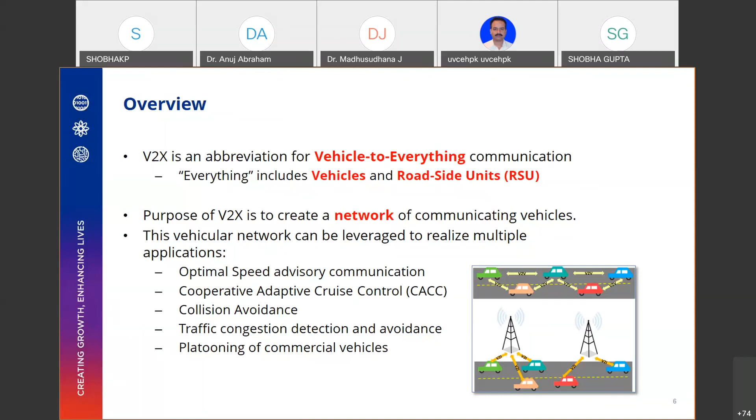So to develop all these use cases, we need a simulator to test the V2X protocols and applications. The first approach was to develop a simulator which integrates some software. Later we need to test the application on this and then in real-time deployments. So as I said, we have developed a V2X simulator, which is an integrated simulator platform.

The problem we were having is that some of the use cases like intersection collision avoidance and platooning we cannot directly test on roads, because there is a risk of collision, and we should avoid testing such applications in real life. And field trials are very often expensive. So we need to develop a V2X simulator so that we can test these sorts of applications in it. Then, a standalone system is not available.

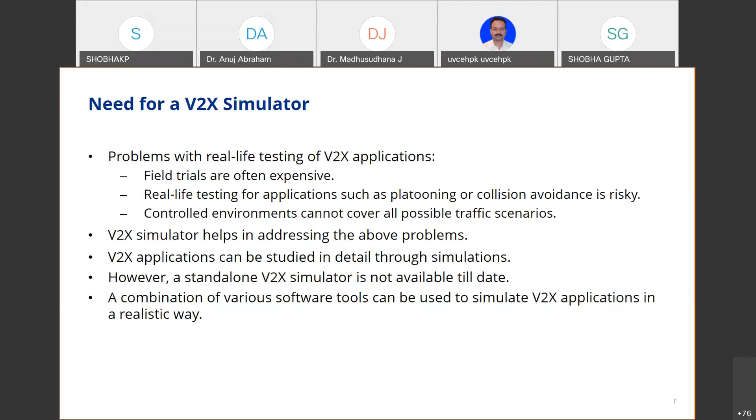In the research community, we can see several simulators have been proposed to study V2X applications. But since there is no standalone package to study V2X applications, we have come up with a standalone approach which integrates three main software tools, which I'll explain in the next slides. A combination of these software tools will allow us to simulate these V2X applications in a realistic way.

So for this V2X simulator requirements, what we want is three components. The first one is a mobility, the second one is a network, and the third one is the application. All the control algorithms will be dealt with on the application side. The network side is meant for the communication section. Mobility is meant for the movement of vehicles. Maybe it should be a traffic simulator software where we can see the vehicles moving based on some control application actions from the other software.

So another requirement is a robust and realistic simulator for information exchange. So we should choose the communication model libraries in a much more effective way so that simulation time synchronization is good and the capability of modeling multiple applications is possible.

And also these algorithms are going to be tested in 2025 in Singapore. Singapore is basically left-hand driving. All the other application simulators present are right-hand driving traffic. So we need to develop a simulator which supports Singapore traffic conditions. So that was another achievement we have come across from this particular development of the V2X simulator.

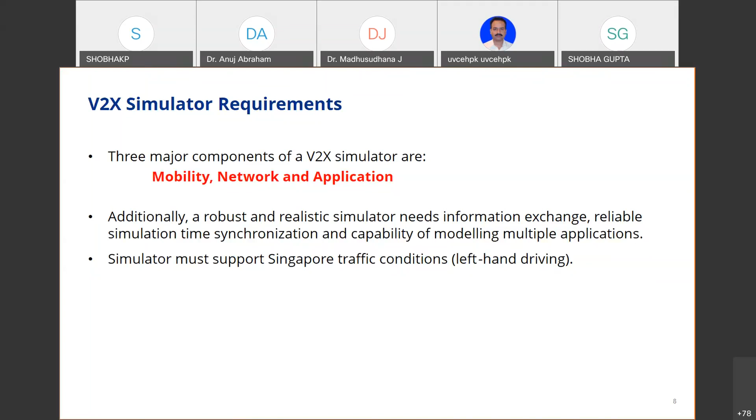So here we can see the basic integrated simulator design. As I said, the three components are already listed in the form of blocks: the mobility, the application, and the network. To demonstrate the vehicular communication as realistically as possible, we chose NS3, which is a network simulator, which contains some model libraries for simulating the WAVE architecture.

WAVE is going a bit into the communication side, but I'll come back to the control later on. WAVE stands for wireless access for vehicular environments. WAVE is actually a family of standards that allow secure V2X communication in a high-speed transport environment. So that is one of the advantages of using a WAVE architecture.

The platoon and the surrounding traffic are modeled in VISSIM. So here you can see the mobility component consists of VISSIM, which is a traffic simulator where we built our road network, the calibrated traffic models, the routing decisions, the routing models, the behavior model of the vehicles, the traffic signal phase timings, controller settings; everything will be done on the VISSIM side. VISSIM is basically a software meant for traffic simulations.

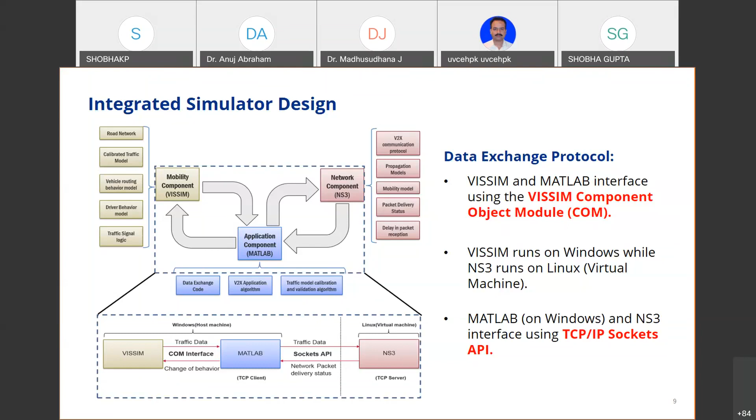So now coming to the simulation side of platooning. This platform is used for many use cases, like GLOSA. There is another one which is GLIDE, which is green link determining. In GLOSA, what we do is we have a fixed time signal cycle time for the traffic light, so the vehicle speed is given advisories.

Whereas in GLIDE, it's just the reverse, which means that there is no advisory given to the vehicles, but depending upon the density of the vehicles, some set of vehicles will be allowed to pass the intersection during a particular green phase. So the green timings will be either elongated or compressed so that you can use the intersection in a much better way. So that is another use case.

Bus bunching is another. Then platooning is another. Many use cases are there, but I'll be just focusing on the simulation of platoon for this presentation. What we have done here is we modeled a platoon, then we designed a controller for this, which is CACC control. We have used PID controllers, and we also tested with model predictive control to overcome some of the disadvantages in PID. We went with the MPC controller, and mainly we do speed tracking, maintaining some desired intervehicular distance, and packet delivery ratio will be analyzed.

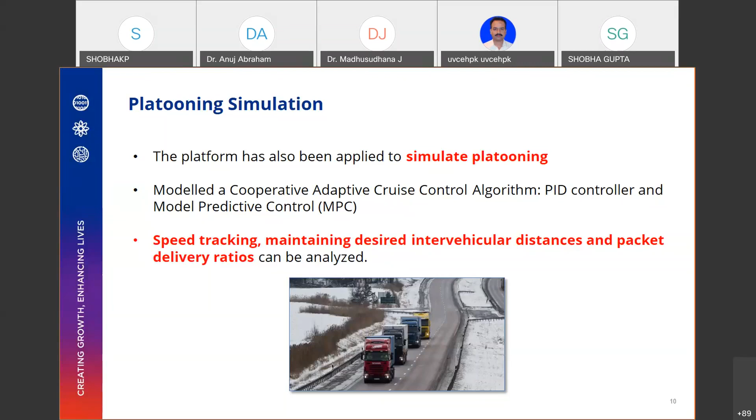Radar means radio detection and ranging. Similarly, LiDAR means light detection and ranging. LiDAR is also known as light radar in some papers. The main sensor used here is a radar. It is one of the crucial sensors you can see in ACC or CACC modes. It works on the principle of the Doppler effect. It is an object detection system that utilizes radio waves to determine the range and velocity of objects. It is primarily used to detect vehicles in front and rear.

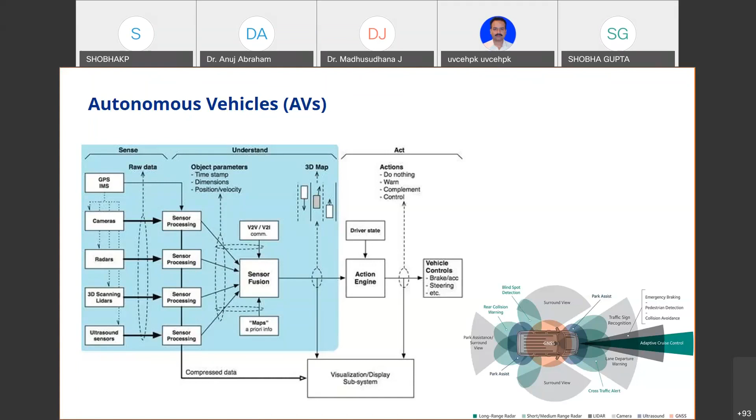Now in the next slide I'll explain what ACC is, and what the difference is between ACC and CACC. Before that, VISSIM uses a psychophysical car following model. What do you mean by the psychophysical car following model? It suggests that a driver's behavior would vary depending upon the traffic state, such as whether the driver is in free flow condition, approaching the vehicle in front, following the vehicle in front, or braking. These types of behaviors are observed with this car following model.

So in VISSIM, which is a traffic simulator, we use Wiedemann 99 and Wiedemann 74, which are car following model libraries available in VISSIM. The car following model is used to detect the driver behavior parameters, and the behavior of the platoon members was modified in VISSIM, and the acceleration and deceleration is calculated using the CACC algorithm.

So ACC is a system that automatically controls the gap between vehicles driving at high speed, by actuating the engine and braking controls, based on measurements of the distance to the preceding vehicles. Whereas cooperative adaptive cruise control is an enhancement of ACC that enables more accurate gap control and operation at smaller gaps by adding communication of vehicle status information from the preceding vehicles. So it is nothing but adding vehicle to vehicle communication to ACC. It turns into a CACC system. If you have vehicle to vehicle communication in a multiple way, then it forms a CACC algorithm.

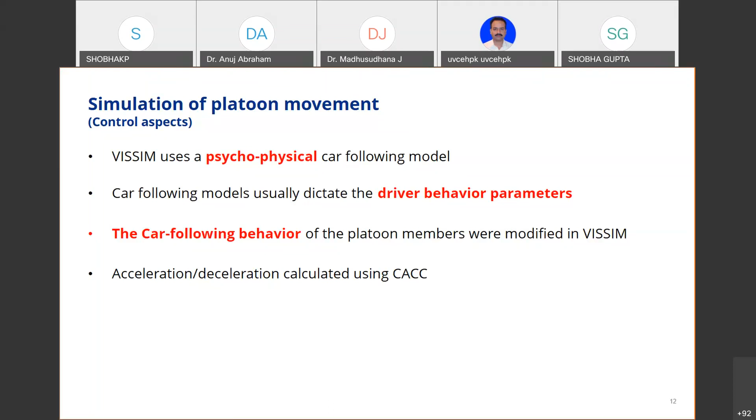In an ACC system, as I said, the controlled vehicle obtains the speed and position of the immediate neighboring vehicles to calculate its control inputs. For this, we use radar for communication between the platoon members. Due to some inherent time delays in radar communication, it is unreliable in some emergency conditions. So to overcome these shortcomings of the ACC strategy, we have proposed a cooperative adaptive cruise control, where we use wireless communication standards such as 5.9 gigahertz DSRC, which is dedicated short range communication, or 5G communication, which we use in mobile, to exchange data among the platoon vehicles.

So the use of wireless standards allows us for the sharing of a wider range of data, such as the GPS position, the IMU unit, then the control actions like throttle or braking. So the access to this more data helps in implementing some advanced control strategies. So that is one of the advantages.

So the use of these wireless standards, which allows a low latency and high frequency data exchange, each vehicle in the platoon receives its position, speed, and acceleration of the leader and the preceding vehicles. Then in a CACC, the platoon member uses this information to compute its acceleration, and it results in better tracking of the platoon as a single unit.

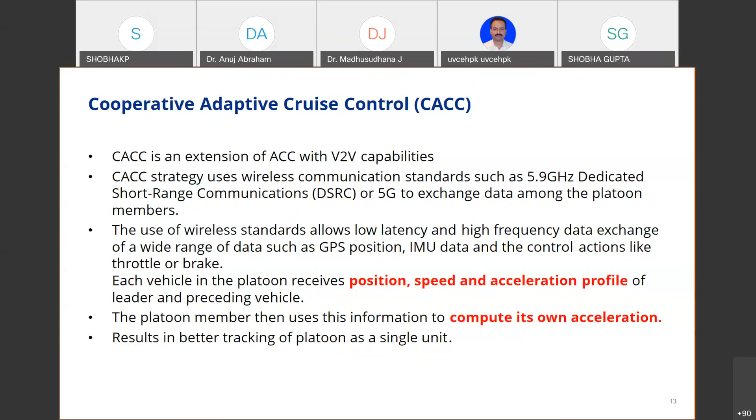So from ACC, we are moving into the CACC. Most of the CACC algorithms you will see in trucks manufactured by Mercedes-Benz or Volvo, for various use cases.

Now coming on to the CACC algorithm. The classical control algorithm we have considered here is for longitudinal control of platoons. We also have lateral control, but for the presentation focus, I just consider only the longitudinal, like on a straight line, a highway, or urban streets.

So the basic control objective here is the follower vehicle should track the leader speed. Then there should be a constant gap between the platoon vehicles, say 3 meters, which we used in the simulation. There should also be a time gap between the vehicles when the trucks are accelerating. The basic terminology we used here is constant distance and headway time, so we use both the combination of constant distance and headway time in the algorithm.

So the basic literature starts from Vehicle Dynamics and Control by Rajamani, where we have the vehicle dynamics for an N vehicle HGV platoon. HGV means heavy goods vehicle. We can also see other names for this, like HDV, heavy duty vehicles, or truck platoon. These are the other terms which we come across in literature.

So we can see there is a header vehicle, a leader and follower vehicle in the iteration, then the remaining are a set of other followers. So this is a concept for a 3HGV, it can be extended for n number of trucks, and how the vehicles are communicating I'll be explaining in detail in the next slides.

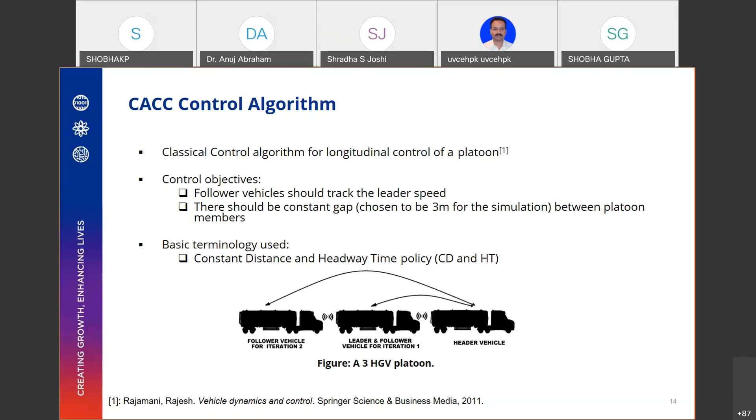So I said the terminology used is constant distance and headway time, but we need to understand what is meant by the look ahead concept, which is the policy used in the platooning. So next we'll come to the look ahead platoon. What do you mean by look ahead platoon?

So you can again see the demonstration of a 3 truck vehicle, as well as how that varies with 4 trucks and for n trucks. In a look ahead platoon, the vehicles are controlled with information from the first vehicle and the vehicle immediately ahead of it. This approach gives better control of vehicles and reduces the risk of collision by multifolds.

So in an ACC system, we'll be having information about the front vehicle. Only one vehicle at a time will be communicating, and we'll get actions based on following the vehicle just in front. In CACC, we'll be having communication between the other vehicles also, like multiple vehicles, and we'll be using that concept here. So ACC does not need to consider multiple vehicle following since it's only meant for a single vehicle.

Whereas CACC, on the other hand, needs to consider the multiple vehicles in its design for the look ahead platoon concept. So using a look ahead platoon framework is expected to lead to large benefits for the platooning concept. So the clearance between the platoon member vehicles is generally implemented in two policies, which use constant distance and headway time.

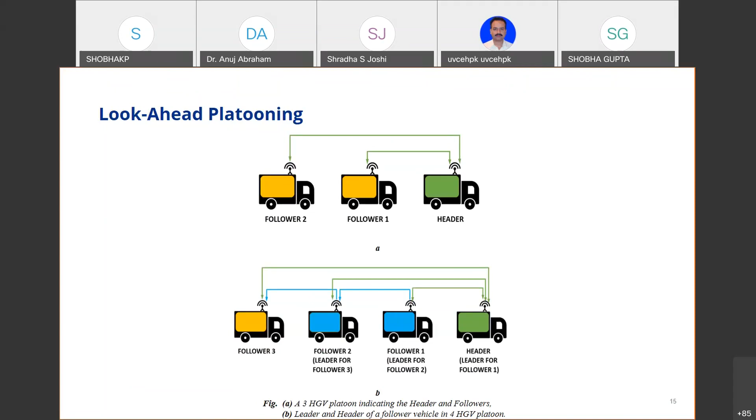Similarly, we can extend this to an n number of platoons. We have also analyzed that we cannot have an n number of platoons—there are some limitations for the communication aspects. We cannot have 20 trucks following the header; there is some range in which we need to restrict the number of platoons. Those sort of analyses were also performed during our testing.

Now we'll see the modeling and basic control design. First I'll come to the modeling. The mathematical model for the platoon of vehicles is explained on this slide. The platoon is considered to be analogous to a mass spring damper system.

You might already know the mass spring damper equation, represented by m x n x double dot plus b x, as shown in that equation. Here n represents the nth vehicle of the platoon, m represents the mass of that particular vehicle, b represents the damping coefficient, x represents the position, and u is the input information, the control action to take place.

To implement the platoon controller with the policy of constant distance and headway time, a PID controller was formulated, with the structure u of t equal to kp into e of t plus ki integral term plus kd into differential term.

I hope you remember the second session of the FDP sessions where Professor J. Prakash explained the different control structures used in PID formation. It can be in the form of series, parallel, interacting, non-interacting, lead-lag compensators, or filters.

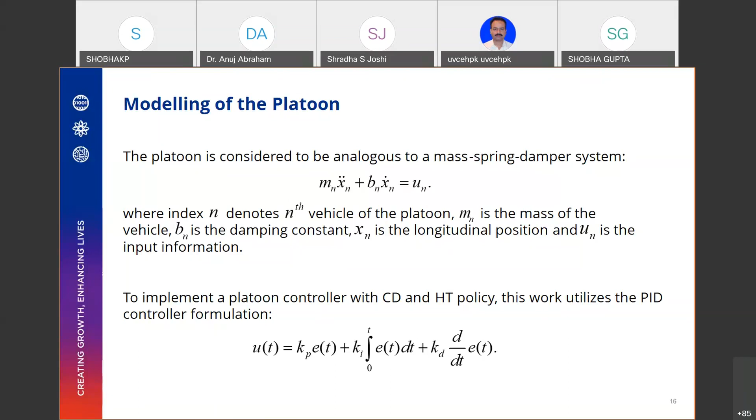So this is a simple PID equation where Kp, Ki and Kd are the proportional, integral and derivative gains. PID's main advantage is error minimization, whether for servo regulation or regulatory response mechanisms—that is one of the advantages of using the PID controller formulation here.

Now I am going to define the spacing errors between the vehicles. Here epsilon, or E, represents the spacing error. X represents the position, and similarly V represents velocity for the vehicles. So the vehicles I'm representing in terms of three suffixes: H, F and L, where H represents header, F represents follower, and L represents leader.

The basic spacing error for the follower and leader is the position of the leader minus the position of the follower. That is the normal error term in terms of position. Into that I am going to add another safe distance, HDFL, which represents the headway distance between the preceding and follower vehicles. That is a constant distance term.

Now I need to add the constant time term, which is the headway time, HW, representing variation in speed. It's simply the speed equals distance by time formula, so distance equals speed into time: VF into time equals HW, where HW is the headway time. This can again be written as XL minus XF, in terms of DXFL minus the remaining terms, and similarly for the follower and header. This is a look-ahead platoon, so we'll be having a double feedback.

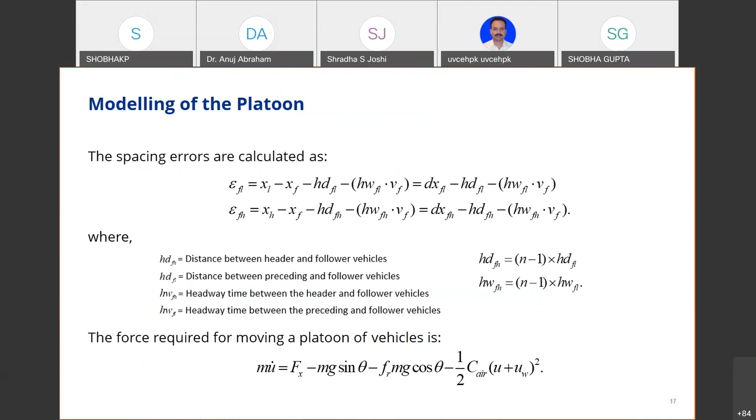That is the basic difference, and we will be considering the drag coefficient value to be around 0.2 to 1.5 for our simulation testing. Using these previous two equations, the PID and the error - substituting the error terms into the PID, then applying that with the force equation, then rearranging some terms - we'll get the control law.

So we understood what the control law is for a PID controller, which gives the acceleration of the follower - at what acceleration the follower vehicle has to move so that it can keep pace with the header vehicle. This control law will be in terms of parameters like Kp, Ki, Kd, and in terms of XH, XL, XF positions. It will be in terms of acceleration of the header, follower and leader, and similarly in terms of velocity - the speed of the header, leader and followers - and other terms as well.

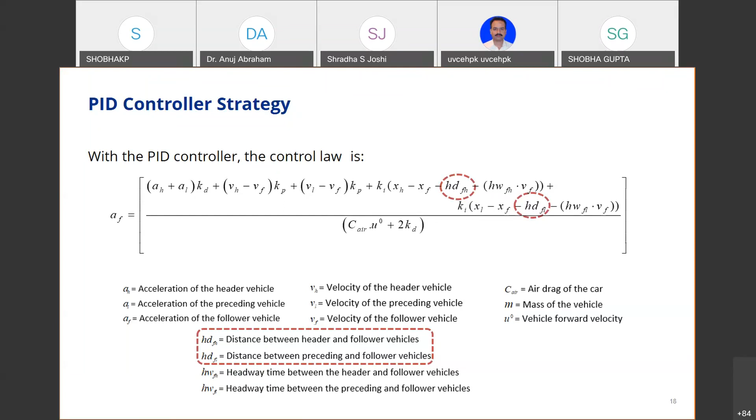So what the proposed control strategy does, this one is meant for the PID algorithm. Later, if time permits, I'll be going through the MPC strategies. So a feasible method of PID control for truck platooning is what we have proposed in the methodology.

So the main highlights are listed on the slide. The controller ensures that the follower vehicles track the speed and maintain a desired gap between the vehicles. So that is one of the advantages. And at every instant, every vehicle broadcasts speed and position information. So each vehicle computes its own control inputs using information from the header and the preceding vehicles.

Then there is an ideal communication scenario, meaning there is no failure of packets, like 100% of packets have been sent from follower to header, header to follower, all those things. So there are no failures of packets. That means ideal communication. So we have tested the scenarios for ideal communication as well as for vehicle-to-infrastructure, vehicle-to-vehicle communication constraints.

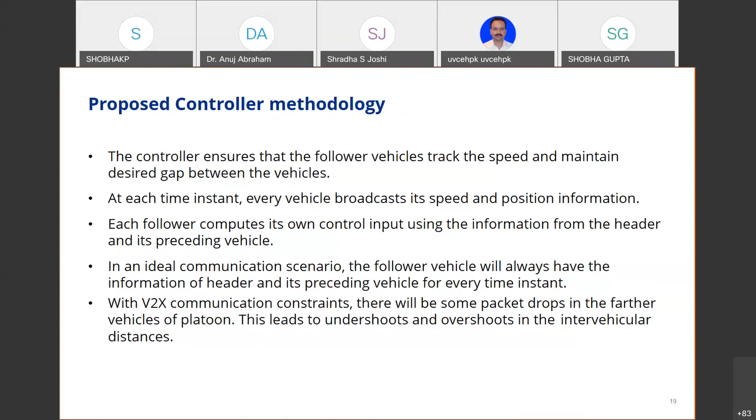So in ideal communication, what we've seen is the follower vehicle will always have the information of the header and its preceding vehicles at every time instant. And with V2X or V2V communication constraints, there will be some packet drops. So as I said, we cannot have 40 vehicles following the header. There's some communication constraint. So we can observe some packet drops in the farther vehicles in the platoon. This leads to some undershoots and overshoots in the intervehicular distance.

So on to the communication aspects, every 0.1 second we are broadcasting the packets. And as I said, we are using the WAVE architecture for the model of communication. The module contains IEEE 802.11p and IEEE 1609.4 standards as part of the WAVE MAC layer protocols. And we are using a Nakagami model to model the propagation losses. So these are related to the communication aspects. I'm not going into detail.

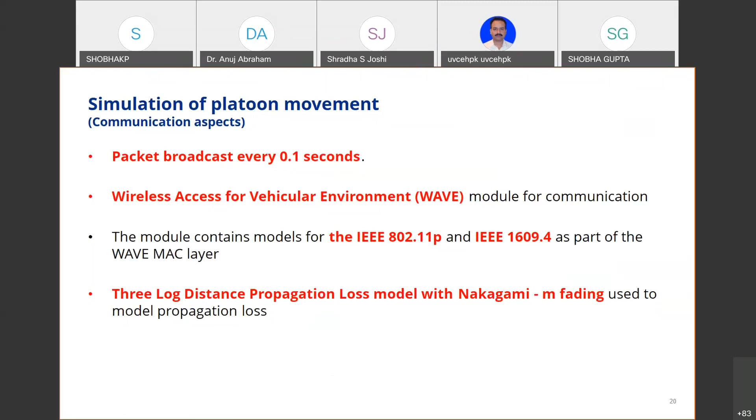So in this platoon we have seen one vehicle following the other. Now what we are going to see is some platoon maneuvers, which means it can either be a merging scenario of a platoon, or it can be a splitting scenario of platoons. So every maneuver can perform either of these two operations.

So suppose there are two platoons moving on the road, and one platoon wants to merge with the other platoon. Then it has to initiate some commands to the header, then some sequence of protocols we need to address, then finally the accept is given for merging initiation. So we are using an ARI protocol for this implementation of communication, where ARI stands for appeal, reply, and implementation. So these are the three phases: appeal phase, reply phase, and implementation phase.

So a vehicle makes an appeal to the header and provides the information related to its request. It can be either split or merge. So if there is a communication failure, then the appeal is sent again in the next time instant or next iteration. If the reply is affirmative, then the vehicle is allowed to carry out these maneuvers, either to split or merge. If rejected by the header, then the vehicle can choose to either repeat the appeal or wait for a certain time depending upon the situation.

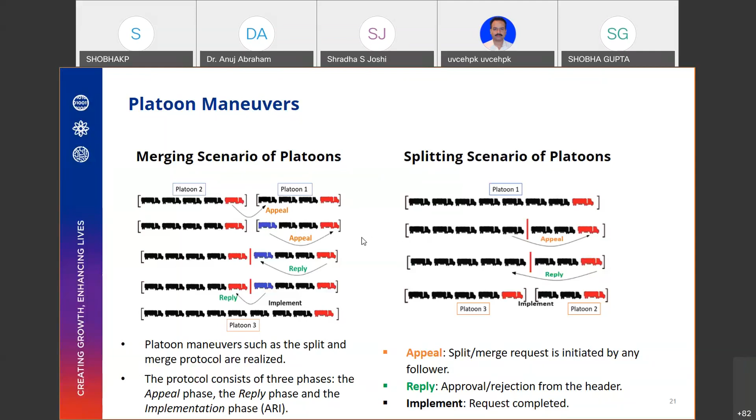Coming on to the ideal communication simulation results, we have considered a map. On the left hand side, we can see a map of road network 1, which is Alexandria Road in Singapore, where it is a straight line. Here we can see the platoon members were simulated. We have created the road layout in Vissim, and we have written the control law in the application side, and then we'll check, with and without communication constraint, how the performance

is differing. On the right hand side, you can see the speed and intervehicular distance profile of a 14 vehicle platoon. The first vehicle is the header, and the remaining are termed as follower vehicles. You can see different colors represented for them. Initially I raised the speed from 30 km per hour to 50, then accelerating to 70 km per hour, then back to stop, which is 0, then again to 40 km per hour.

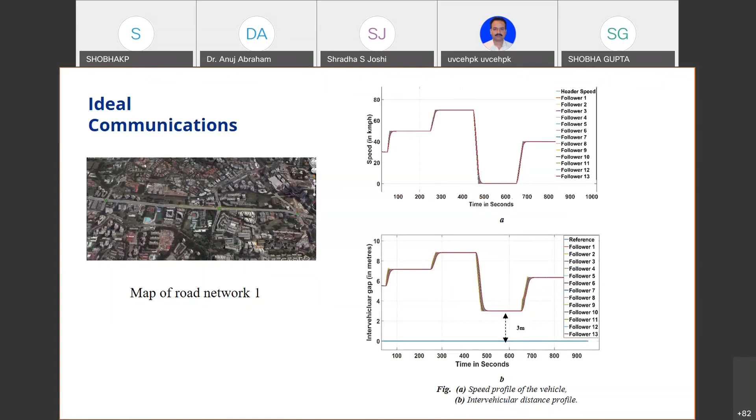So this is very smooth. You can see all the vehicles settling fast, and in the intervehicular gap there is no disturbance, because it's an ideal communication. I'm not considering any packet loss in this. When I'm considering the packet loss, which means the V2V communication constraint, this is for another road, which is UVCE, in Bangalore.

The map of road network 2 is shown on the left hand side, in Vissim. On the right hand side, you can see it's not that smooth. It takes some time for the follower vehicles to settle to that particular speed, as well as the intervehicular distance between the vehicles. The follower vehicle, represented as 12 or 13, takes more time, or maybe some packet drops occur in those particular follower vehicles.

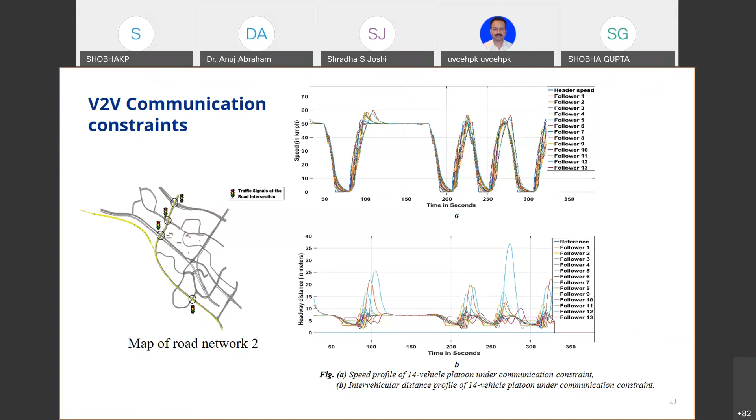So this is the observation, and a lot of analysis is based on this. I'm just highlighting the difference between ideal and V2V communication constraint, when we consider there is some packet loss in the information exchange during the protocols. So this is for a single platoon case, the ideal communication and V2V communication, what I consider.

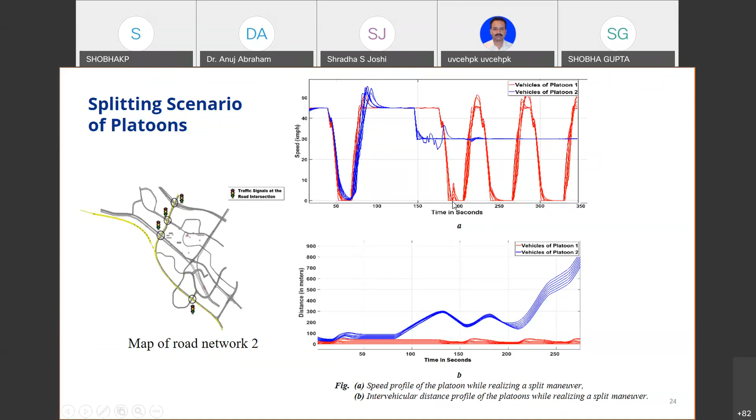The 0 here represents that the vehicles are stopping at these signals. On the left hand side on the map, you can see there are some traffic signals, and the stops represent the signals, where the velocity will be 0, with the 3 meter distance.

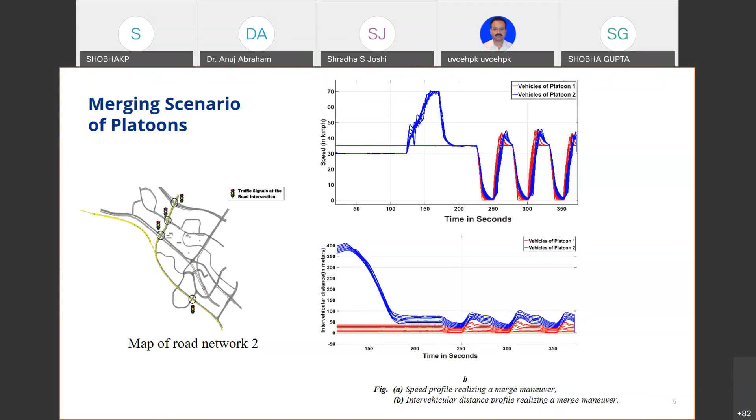Before that, it reaches the intersection, so that's why you're not able to see the settling of the controller design. In the bottom figure, you can see the intervehicular distance, in meters. It maintains an equal 3 meter distance between vehicles, which we set in the control algorithm. So we have realized merge and split maneuvers under ideal and communication constraints.

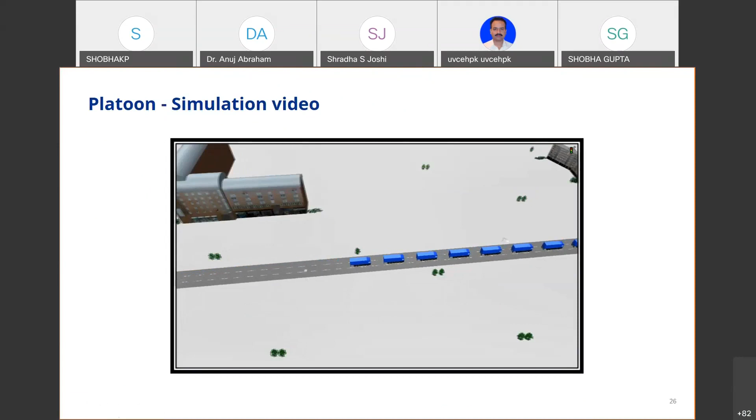This is a simulation video where I'll be demonstrating the platoon maneuvers, splitting and merging, with V2V communication. This is a demonstration of heavy truck platooning on a highway. Here we can see the platoon moving in a single formation on a highway. Yellow indicates the header, and there are 14 vehicles moving. Now the fourth vehicle from the platoon wants to split. It gives a request to the first, and now it forms 2 platoons, and a platoon lane change happens.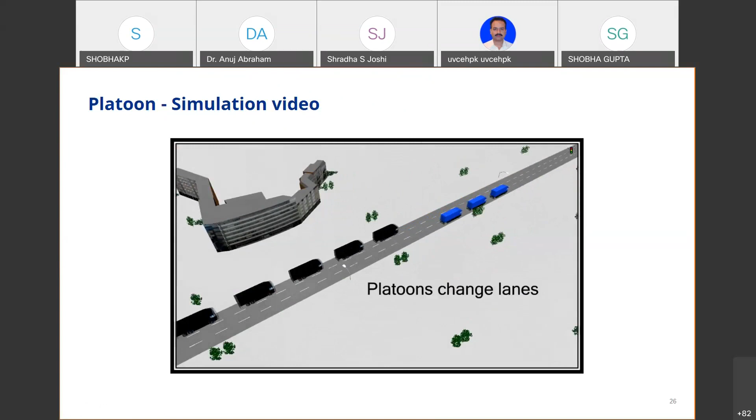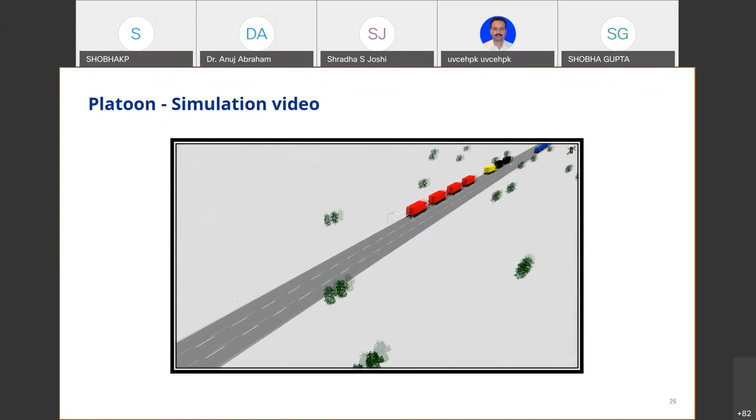So blue and black. Now merging is going to happen. So in the second platoon, the third vehicle wants to communicate and go and merge with the first platoon. So it initiates the ARI protocol. Then you can see that the fourth vehicle wants to come out. The third vehicle wants to come out, and it moves out of the blue platoon and reaches that particular platoon, and the platoon merge initiation is completed.

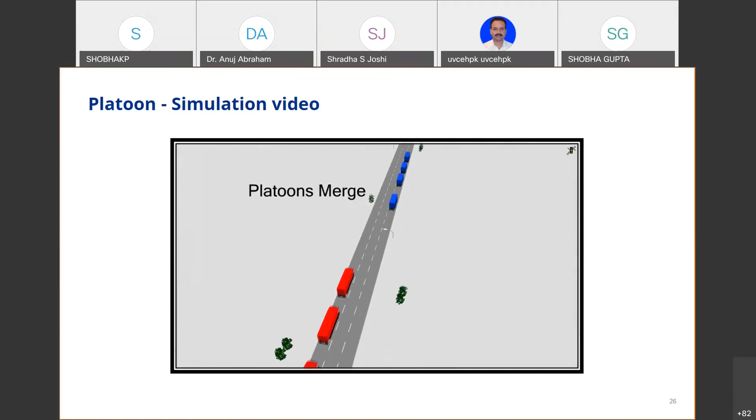So this is a platoon merging scenario. This is demonstrated in the VISSIM simulation platform.

So it's time, 3:34, maybe in a couple of 10 minutes I will try to wind up the unconstrained MPC. So we have tested the MPC and the PID in our control developments. So the problem with PID is that it's an error minimization, but if there are successive packet drops, then PID cannot handle that concern.

So MPC has some advantage, which means that it predicts over a horizon, and if any successive packet drops are there, then it will take them into account, and some predictive action can be taken into consideration for the design against successive failures of information exchange between the platoons.

So here we can see, as in the 3 HDV platoon, we can also see here 3 subsystems. So the first one is the first vehicle, then the J-1 vehicle and the Jth vehicle. Then we have a reference. Then we have the MPC controller, and acceleration for all the subsystems will be calculated as a control action. So given a cost function, a finite horizon, constrained optimal control problem is defined to solve to determine optimal values.

So here also in the MPC controller, the main objective is to maintain the intervehicular distance and headway time between the vehicles for 2 cases. One is the unconstrained case, and the second one is the constrained case optimization problem. So the controller starts adjusting the control signal ahead of the reference changes. So in a constrained optimization problem, the controller allows the flexibility to constrain the process variable. So mainly we are considering here the acceleration and speed of each vehicle within some user-defined limits.

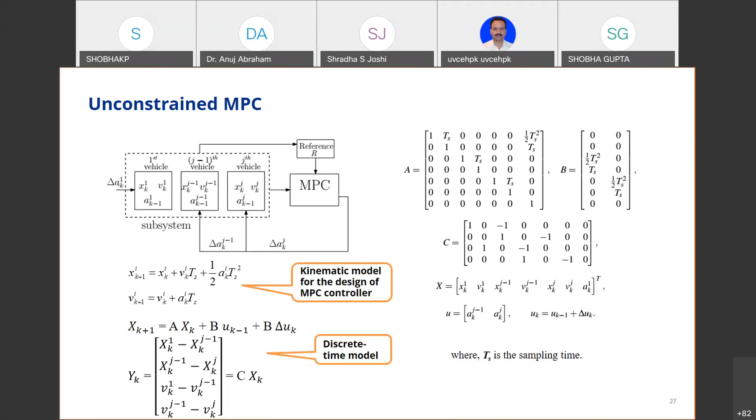And the control action, as I said, is in terms of acceleration, change in acceleration. So it is delta AK and delta AK J-1. So all these equations are used to formulate the unconstrained MPC, and the reference is defined again in terms of constant distance and headway time. So here we can see HD1 represented in terms of the constant distance and velocity into time. So that is a headway time. Similarly, HD2 is represented in terms of HD plus VK into T for the J-1 vehicle and Jth vehicle, and similarly extended for n number of vehicles.

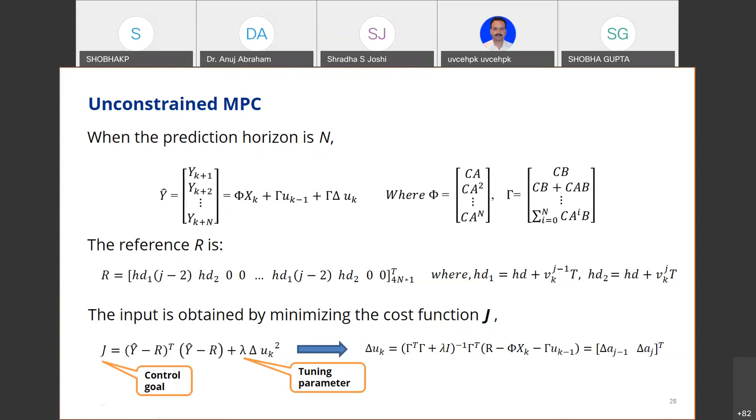And this input is obtained by minimizing the cost function, which is J in terms of Y transpose Y plus lambda, which is the tuning parameter, multiplied by the control action delta UK. So finally, if you substitute all these equations, we can represent delta UK in terms of this one, which is nothing but the change in acceleration for J-1 and the change in acceleration for the Jth vehicle. So this is the control goal for the unconstrained MPC. Now, when we come to the constrained MPC, all the equations will be the same. The only difference is that we have some upper limits and lower limits.

So basically, for our simulation, we have considered the velocity and the acceleration to be the upper and the lower bounds. So we will be using a cost function again in the standard form for a quadratic programming problem. So we use quadprog, which is a command used in MATLAB.

So again, we'll be defining the cost function in terms of the H matrix, which is the Hessian, and the control input delta U. And again, H is represented in terms of this. You can go through the MATLAB help so that you can know how to frame this cost function. So similarly, we'll be finding the A matrix and the B matrix for this.

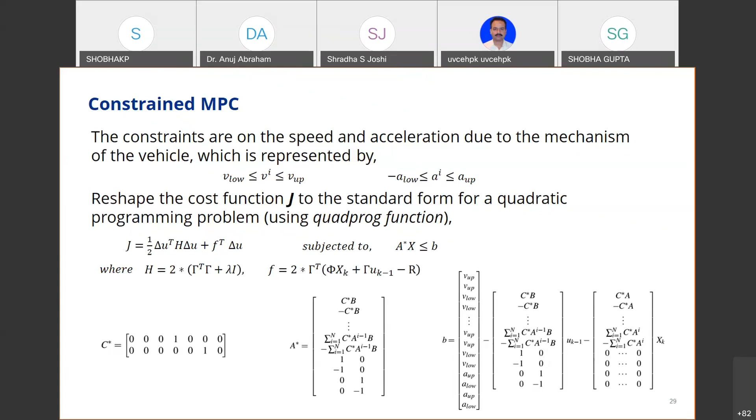And finally, we have tested this one for a US freeway highway I5. So it's a road layout in the US. So with the parameters as listed on the right hand side, we have considered a 14 vehicle platoon with a sampling time of 0.1 seconds.

The KP, KD values are tuned based on artificial intelligence methods, either using PSO or genetic algorithms, or from the ZN or Cohen-Coon or direct synthesis method. Then the prediction horizon and control horizon are considered to be 10. The tuning parameter is considered to be 0.1.

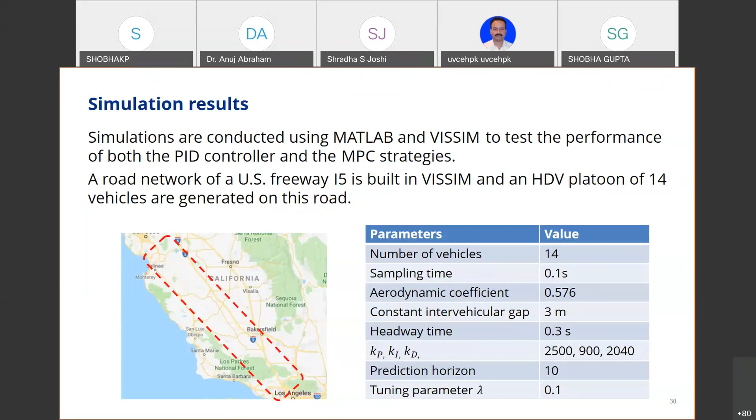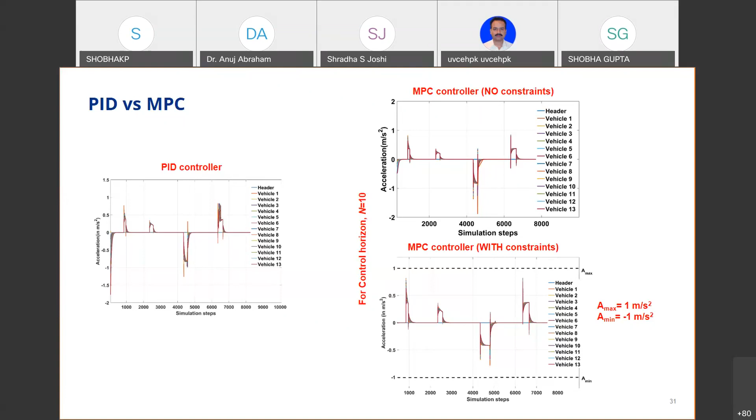And the MPC controller with constraints, we can see it is well within that acceleration limit of +1 and -1 meter per second square. So we are giving some constraint to the variable so that we can limit the acceleration as well as the velocity, and in the remaining response, we can see some kicks or some spikes at the speed change, and that can be minimized with the help of the prediction as well as with the help of MPC control.

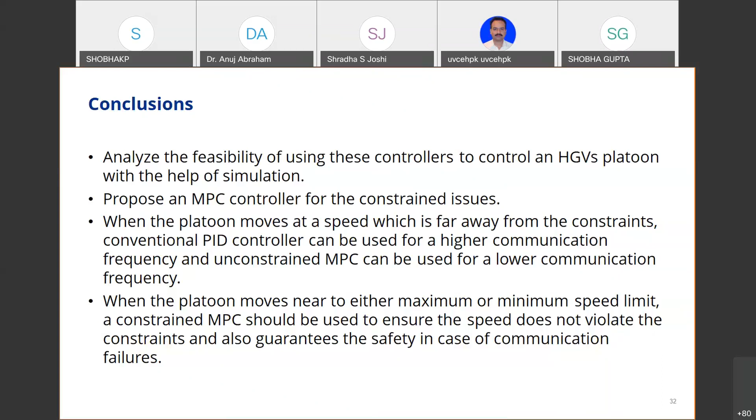So onto the concluding slide, we can analyze the feasibility of using these controllers to control an HGV platoon with the help of the simulator design. So we propose an MPC controller for constraint issues, and when a platoon moves at maximum or minimum speed limits, a constrained MPC should be used to ensure that the speed does not violate the constraints, and also it guarantees the safety in case of any communication failures or propagation delay. So we can consider all these aspects in the MPC design.

In summary, I can say that the concept of platooning is one of the important research topics in the V2X domain due to the benefits it brings to road transport. And a look ahead platoon, which I explained in the previous slides, is used for MPC and PID controller design. And it's a standalone realistic integrated simulator for V2X protocols and applications. And we have tested the platoon in this particular environment.

So for platoon maneuvers, we have used ARI protocols, and these are effective in carrying out platoon maneuvers as realistically as possible. So this analysis helps to determine additional sensors which are required to provide a fail-safe alternative in case of any communication failures.

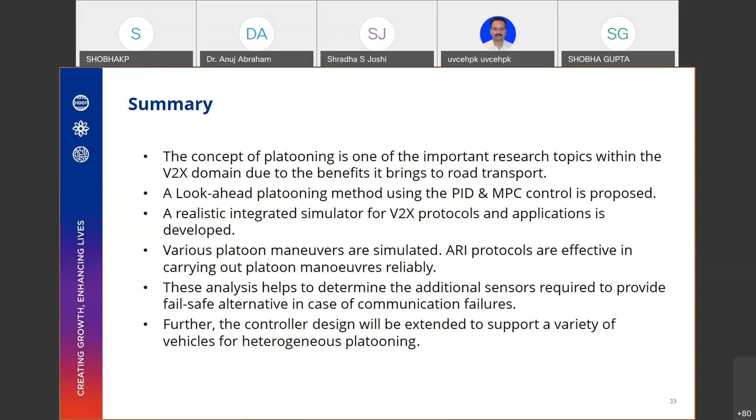Then further, the controller design will be extended to support a variety of vehicles for heterogeneous platoons. Here I've considered only trucks. So maybe it can be a truck communicating with a car communicating with the infrastructure. So when this comes into design, then it's a challenging research area where the mass of the object will also have to be considered in the controller design, and then the controller goals and controller law will be extremely changing there.